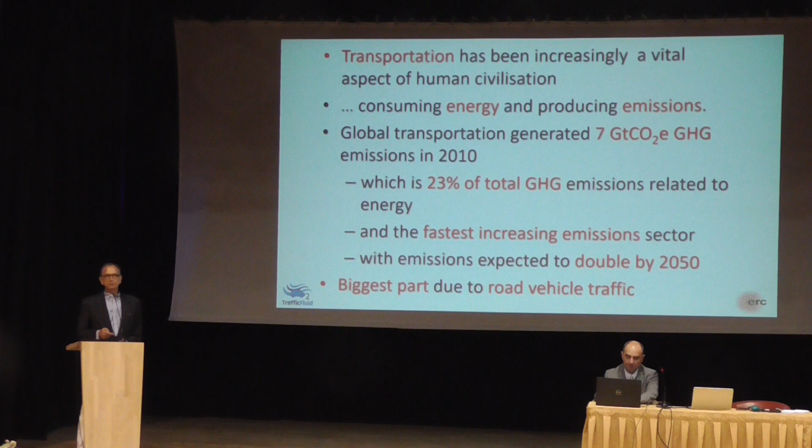As we all know, transportation exists since human society exists, but of course in recent decades, the last century, it has been increasing steadily in importance, and of course it is a sector that consumes energy. I'm not an expert in sustainability, but I picked those numbers about the corresponding emissions, which are 23% of the total greenhouse gas emissions related to energy, but it is the sector that is increasing most rapidly, and there are predictions that these emissions will double by 2050. Of course, I'm talking about transportation in general, but road traffic is the biggest part of those emissions. And that's the subject of our presentation.

Another thing we all know is that the motorized vehicle has been a very influential invention of mankind, and has shaped even the image of our planet. If somebody would come from Mars and look at the Earth, one of the first things that would probably be realized are the highways, the roads, and all those vehicles moving on them.

Of course, vehicles share a common infrastructure among them, but also with other users. And so it is necessary to have some rules. And this is the start of traffic management, traffic control: have some rules that guarantee that antagonistic streams of vehicles and other users are crossing in a safe way.

So safety is the first concern for traffic management, but in the last decades, as the density of vehicles, the number of vehicles, the demands on the roads increases more and more, we need to also look at efficiency of the traffic flow, and then traffic management becomes dynamic or real-time, as we will see, and this characterizes the era of today. Dynamic traffic management, which beyond safety also, of course, needs to address as far as possible efficiency.

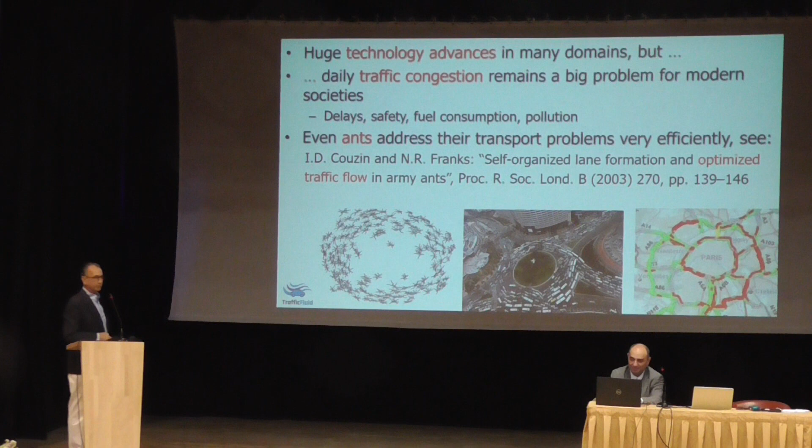And in this article they document that the ants behave, of course taught by biological evolution, in the best possible way to maximize the throughput of their highway. Something that for us is still, of course, not the case, whether in urban areas or in highway areas.

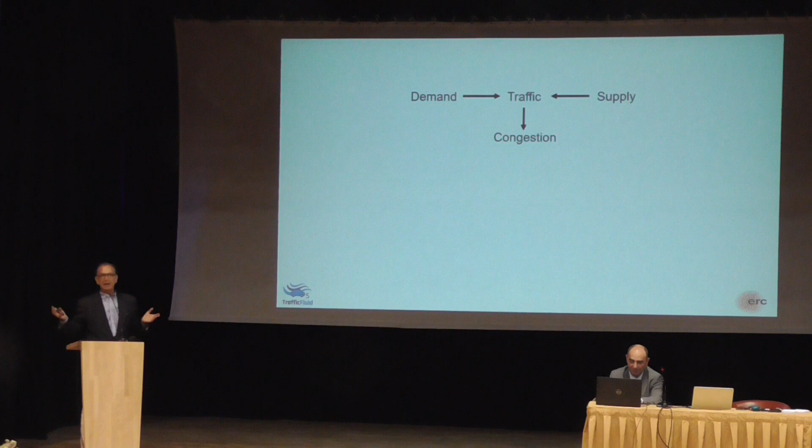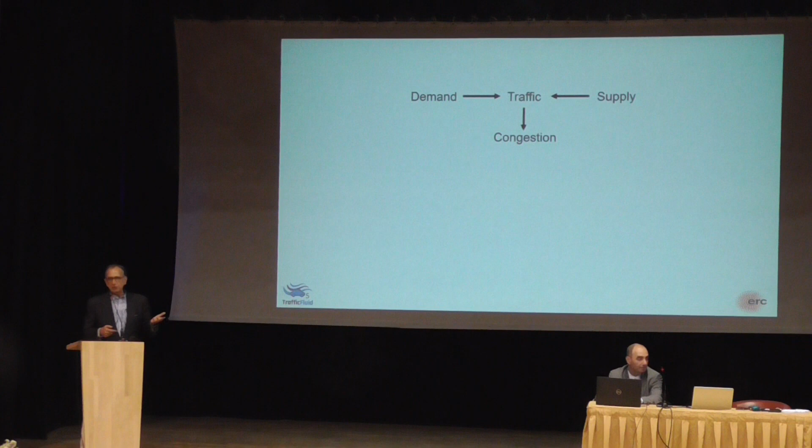Traffic depends on the match of two things. On one hand, the demand, which is the amount of vehicles, of drivers, of persons wishing to use the traffic network, and on the other hand, the supply of the traffic network, essentially the capacity of the traffic network. And these two things form traffic, which may be congested if the demand is higher than the supply. And so by this simple relationship, we can deduce easily what should be done if we want to mitigate congestion.

Either we need to reduce the demand, or we need to increase the supply. And here you see various ways of reducing the demand, or attempting to reduce the demand, like modal shift, meaning that in many different ways you try to have passengers moving from their cars to public transportation, or avoid the trips via teleworking, online shopping, etc., things that are meanwhile very familiar to us after COVID-19.

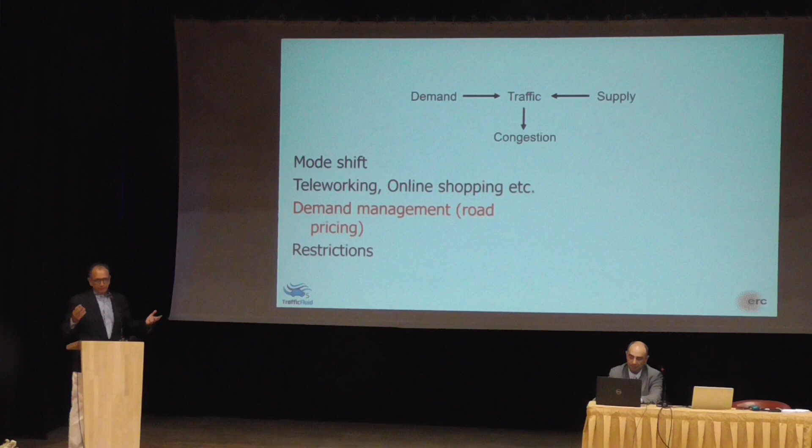Demand management. A major measure in demand management is that you ask the users to pay for using the roads, something that is practiced in many places around the globe, or of course just harsh restrictions of vehicles where they can actually drive.

On the other side, we may increase supply, increase capacity. How? The traditional way, which is of course not very popular meanwhile, at least in developed countries, is by expanding the road infrastructure. This is not deemed now to be the proper way if a basic infrastructure is already there. Providing information and guidance in real time to the drivers so that they may use parts of the network that are less congested, so exploit better the infrastructure, or traffic control.

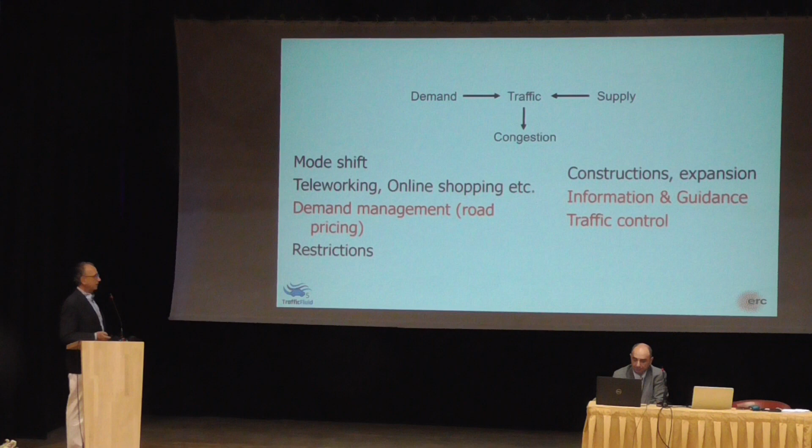And as a matter of fact, and as I mentioned, our roads are indeed congested during peak periods, both in the cities and around the cities. And this congestion, without counting for the accidents and anything else, costs Europe at least 1% of the gross domestic product. Right? And this is rather an underestimate because it is from a few years ago.

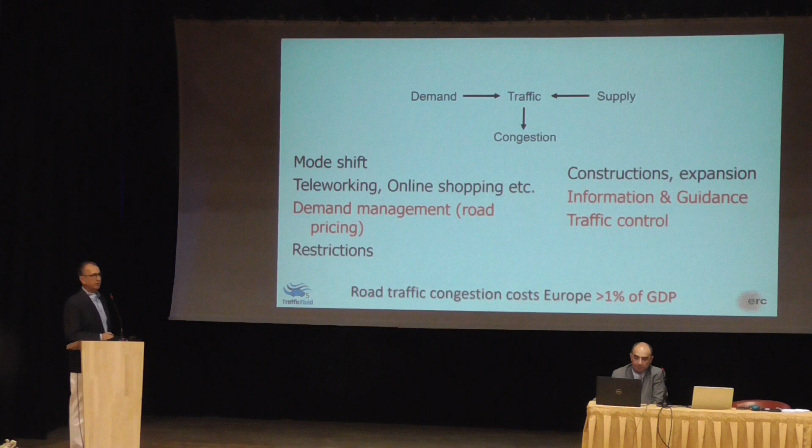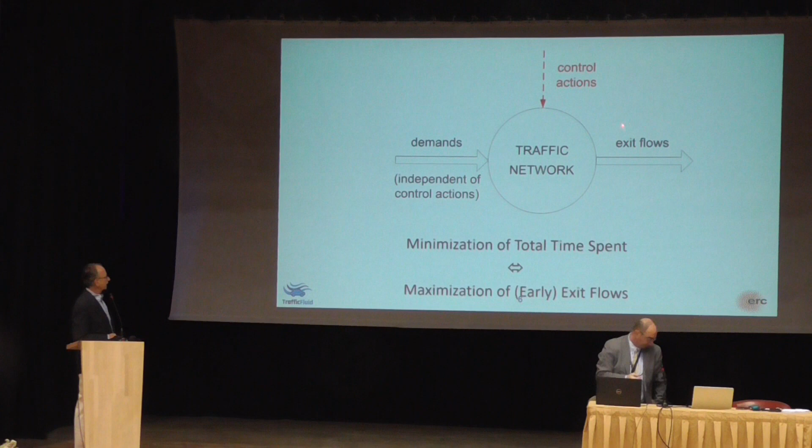Another useful slide to gain a bit more insight into what happens is this one, in which we have a traffic network of any kind. It can be transportation, and it can even be other kinds of networks, which receives a demand at its origins by vehicles that would like to go through this network to reach a destination, and the exit flows.

So, assuming that the demand is not changing, if we want to apply control actions to the network to minimize, obviously, the total time spent by all vehicles in the network, then it is very easy to understand and also easy to prove mathematically that this is equivalent to maximizing the exit flows. Because if the entries are given, to spend less time in the network, you need to maximize the exit flows. And as a matter of fact, congestion reduces the exit flow, blocks the exits of the network. And this is a reason for the generalized congestion that we witness today, as we will also see in a minute.

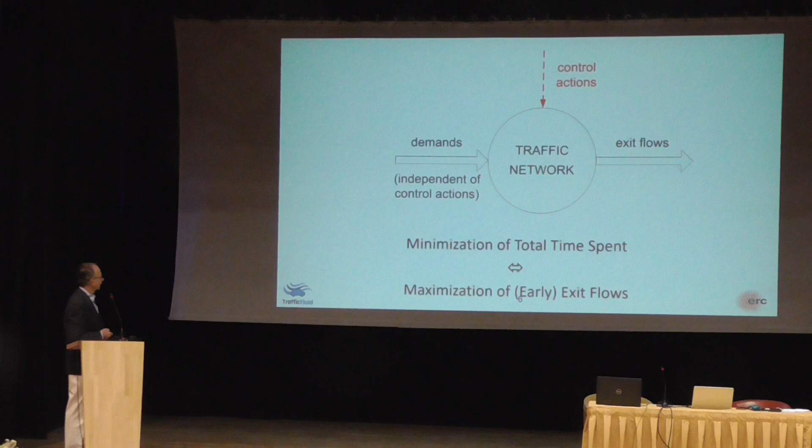To better understand this, let's compare other kinds of networks or queuing systems. If we have a simple queuing system, like you go to the airport to check in, and if the demand, the number of passengers, of clients, is higher than the number of employees, the number of counters, there will be a queue. So you will experience a delay.

However, the characteristic of a simple queuing system is that the capacity of the system, the serving capacity of the system, is constant, roughly. It's not a function of the presence of a queue or of the size of the queue. The employees will work at the same or similar pace whether there is a queue or there is no queue. That's a simple queuing system.

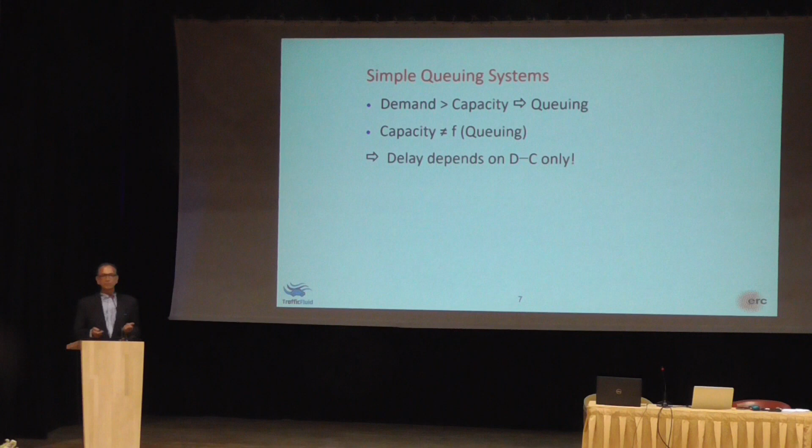There are other systems like water systems where higher demand and congestion, higher water level, means higher pressure and higher outflow and lower travel times. So in water systems, if you flood it, you get more out of it due to the pressure. It's not like a simple queuing system.

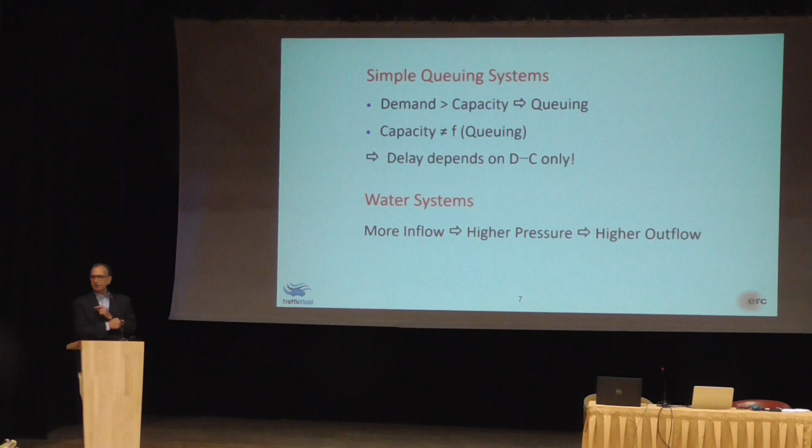What about traffic systems? Well, in traffic networks, for reasons that we will not discuss in detail here, any congestion leads to a degradation, a reduction of the capacity of the system, and a reduction of the exit flows.

So what happens is that if, in some link in the network, you have the local demand being higher than the local capacity, then you will have queuing, you will have congestion. And this congestion will degrade the local capacity, and this will, of course, accelerate the increase of congestion, and this will lead to further congestion and further degradation, and so on, so that eventually we get a vicious circle of events, and at the end we have a network that is strongly underperforming due to the degradation.

In fact, during generalized congestion in the network, if you measure the demand that is being served, it is much less than the nominal capacity for which the network was constructed. The system is underperforming.

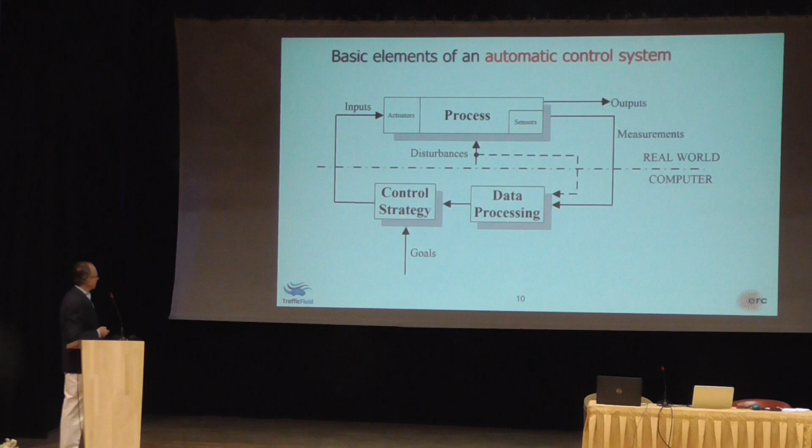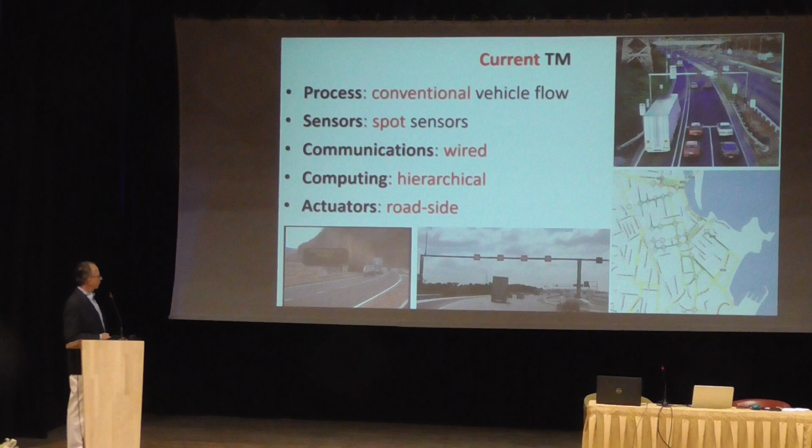So all these systems that are around, they have roadside actuators, the same for all vehicles, for all drivers. And in fact, our lab has worked in all of these areas, and we have many operational tools of these systems in 5 continents. And I would like just to demonstrate to you via simulation a variable speed limit system.

What we see here is a highway. There is a lane drop at the end, for example, because of a work zone or other reasons. And this forms a bottleneck. So if the demand is higher than the capacity of the bottleneck, then you will have congestion. So in the lower video, there is no control.

In the upper video, you have a variable speed limit here, about 500 meters upstream of the bottleneck, which you will see in real time being changed, because in the upper system we have a traffic control system measuring at the bottleneck, and depending on the density that it measures there, it reacts, and the variable speed limit tries to hold back traffic so that you never allow congestion to form.

I was expecting to see the video. Maybe I should operate it from the...

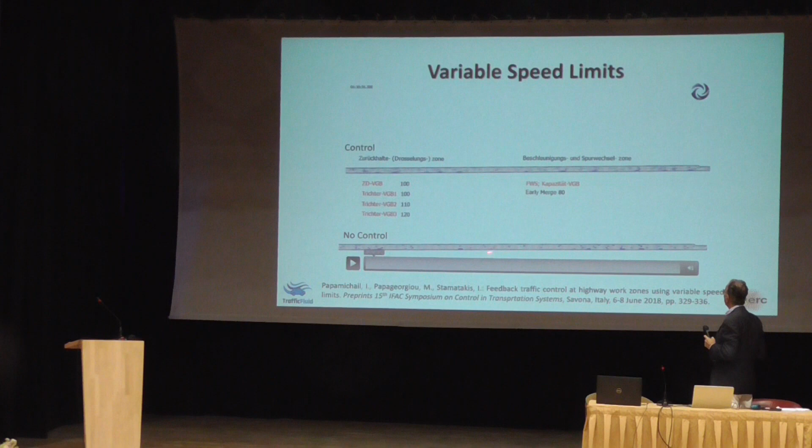So you see already here that in the case without control, we have already a queue that has formed because

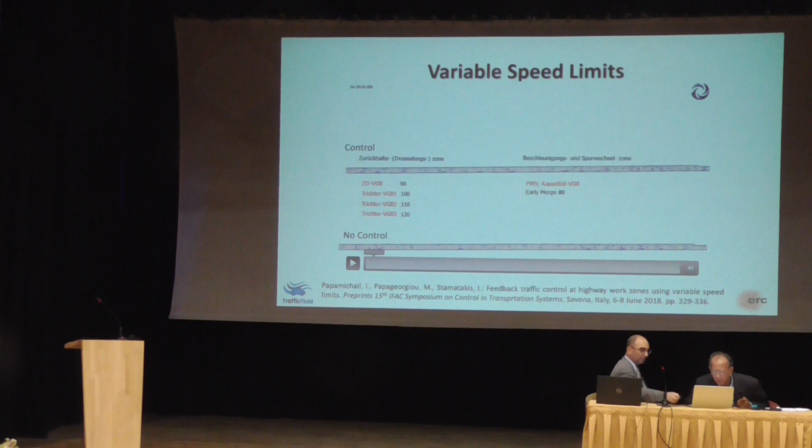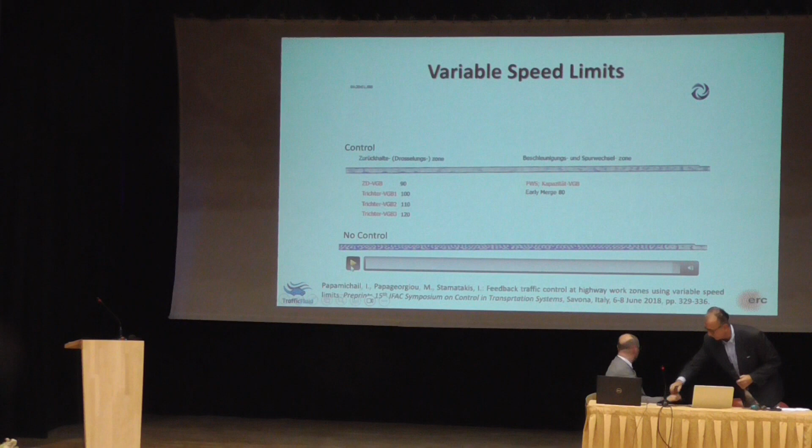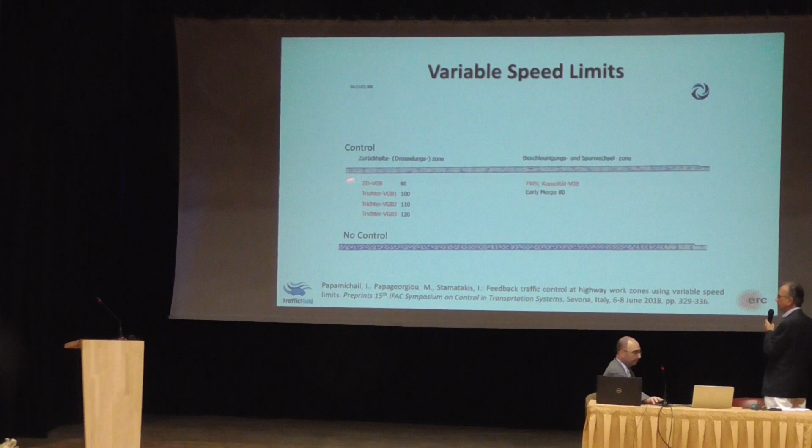That was already very far in the simulation, no problem. So what happens here is that whenever you have a higher density measured, this variable speed limit will reduce the speed limit to hold back traffic and dissolve any possible congestion that forms here. So this is an example of going slower to arrive faster.

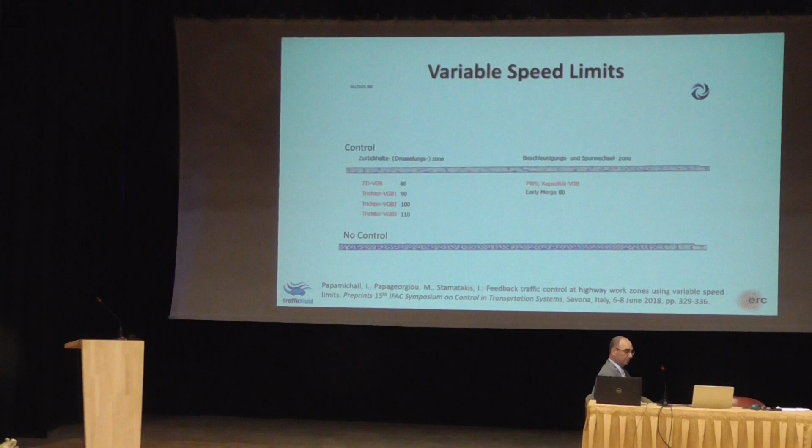While here, as you see, a queue has formed, and due to the queue, the outflow is about 15–20% lower than the maximum possible outflow, and so this leads to a corresponding improvement. So that was about the recent past and a big part of the present. That's the state of today.

So let's move a little bit to a more recent present and the short-term future. What we have today is a number of vehicle automation and communication systems that are being developed, and that can be classified into two axes. The first axis is about vehicle automation. Vehicles become more and more automated, or intelligent if you prefer.

There are already many systems that are available in the market. Most of the new vehicles dispose of an ACC system, adaptive cruise control. What is it? It is the ability of the vehicle to follow at a safe distance a slower vehicle in front without you needing to touch the brake or the gas pedal, right? Or also pilot assist systems that keep the vehicle in the middle of the lane without you touching the wheel. These systems are already in many models.

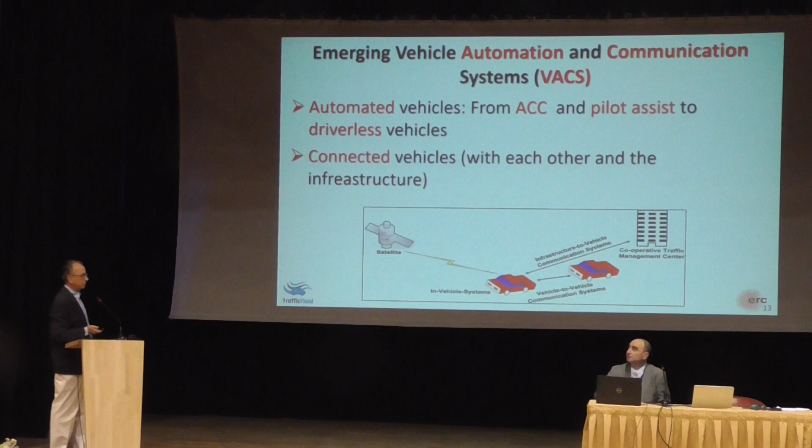Connectivity means that vehicles have wireless channels to talk, communicate with other vehicles around them, and also with the infrastructure. So these are changes in the vehicle itself, but they bring along also pretty important changes to the traffic management loop and its elements. For example, the process, of course, is still the vehicle flow, but now vehicles have different behavior than conventionally. Sensors.

Since vehicles are connected, they can send information to the control center about their speed, about their distance to the front car, and so on. So you don't need sensors, because vehicles become sensors that send much more information and much more precise information about the current situation. Communications. Not only are they wireless, but the most important thing, as I mentioned, is that you have a lot of new channels between vehicles and infrastructure that can be exploited for better safety and better efficiency.

Computing. What we have essentially with intelligent vehicles is a big number of moving, interconnected computers. So those computers can undertake tasks that conventionally were reserved to the traffic control center. And last not least, actuators. If vehicles are connected, they can receive all the messages on board. So you don't need to have roadside signals or messages that are the same for everybody. You can have individualized signals and messages and information. And we can see some examples.

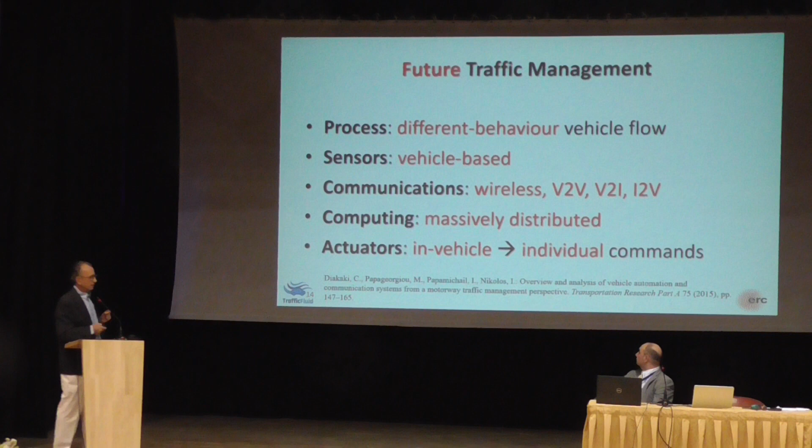All these things, of course, have implications for the traffic flow. Not always for the better, unless they are exploited in a proper way. And so the first ERC advanced grant that we got, that the chairman mentioned, was about looking at these things for now and short-term future in an environment where we have mixed traffic, meaning both automatic vehicles at different levels of automation and connectivity, and human-driven vehicles. How can we exploit the increasingly available capabilities of vehicles to make traffic safer and more efficient? So that was the content of the Traman 21 project, and I can give you a few highlights of it.

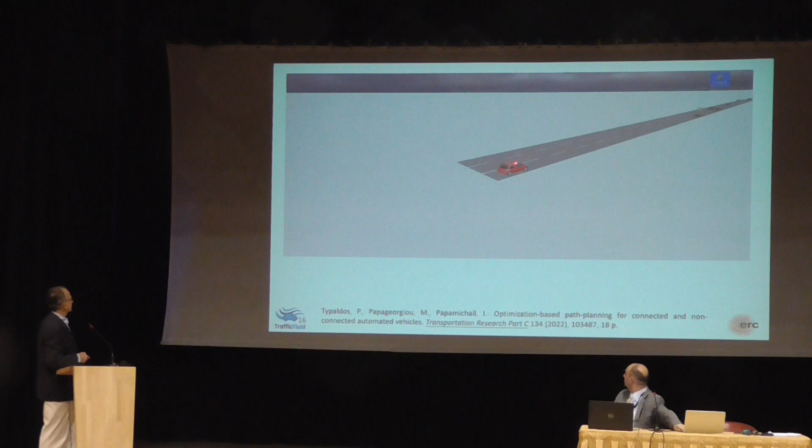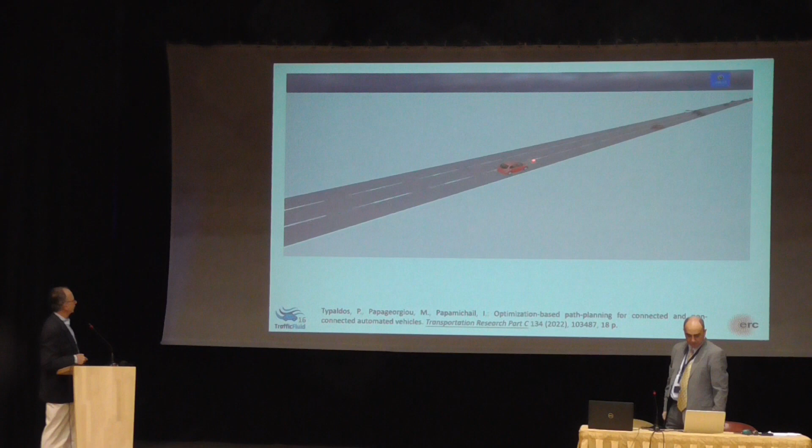So this is an automatic vehicle among manually driven vehicles, and you can have any percentage of automatic vehicles. The question is, how should it behave in a population of automatic vehicles? You see it here, driven by an algorithm, driving. It has three basic goals. The first and most important is no collision, safety. The second is that the driving is comfortable for the passengers. And the third is that it tries to reach a desired speed, if possible. And you see it trying to change lanes and make everything possible to satisfy those three goals.

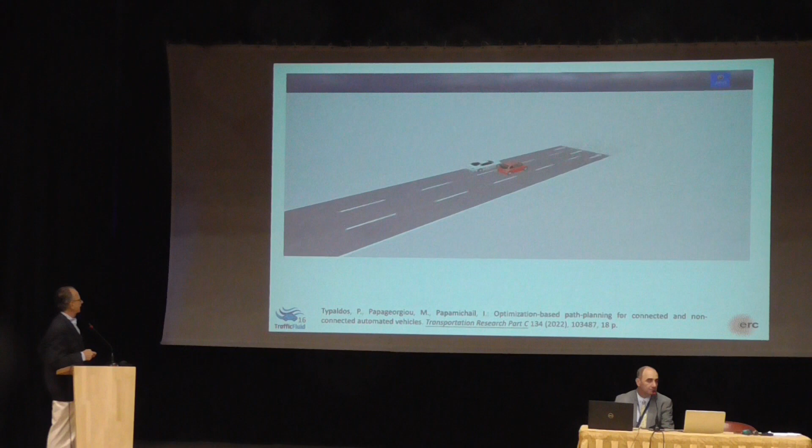This is the second example that most of you probably know, the famous GPS. What is it? Well, GPS is an individualized message for you, as I mentioned earlier, because you enter your destination and it guides you to your destination. So nothing to do with roadside messages.

And of course, you may not be aware, but you are also connected to the corresponding center of Google, of TomTom, whatever system you are working on. So that's how they know the current state of traffic, because they get messages every few seconds also from you, and not just from you, but from many other cars, so they can anytime be aware of the situation to be able to guide you in an appropriate way.

Another potential application is that due to the individualized commands, you can better balance traffic on highways, for example. Usually, the drivers by themselves are not able to optimize the traffic flow, to optimize their assignment of lanes, to retard or avoid breakdown in congestion.

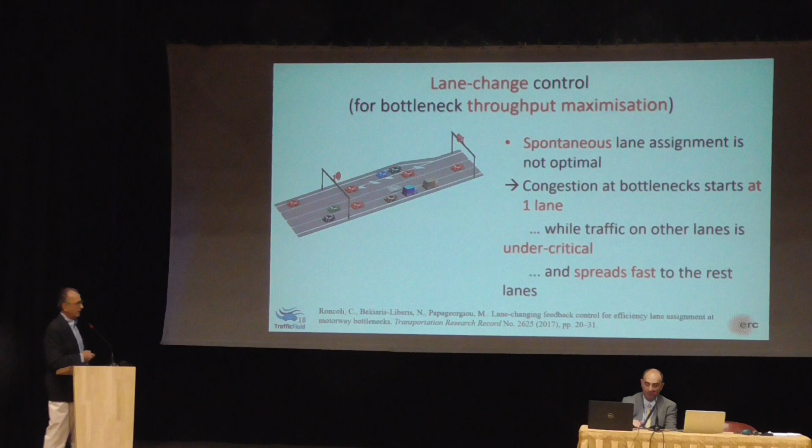And it wouldn't be possible with a roadside system, because what should you tell? Every 10th vehicle change lanes to balance better? That's not possible. But if you can send individualized commands, then you can balance traffic on the different lanes better, and in this way avoid congestion.

Another example, the GLOSA systems, green light optimal speed advice. What is it? Well, every driver among you probably has had this dilemma. You are approaching a traffic signal, which may be red or green, and you see it from, let's say, 200 meters distance, and you don't know how to behave in the aim of crossing without stopping. Should you accelerate? Should you decelerate? Should you go by the same speed?

You don't know. So GLOSA are systems that help you address this dilemma and cross, if possible, at green, of course, but without stopping. There are many apps of this kind, even for iPhones, where you either get a message when there is no realistic possibility to not stop, or it guides you to maintain, increase or reduce your current speed to be able to cross at green. Such systems may reduce fuel consumption and emissions by as much as 20% when applied.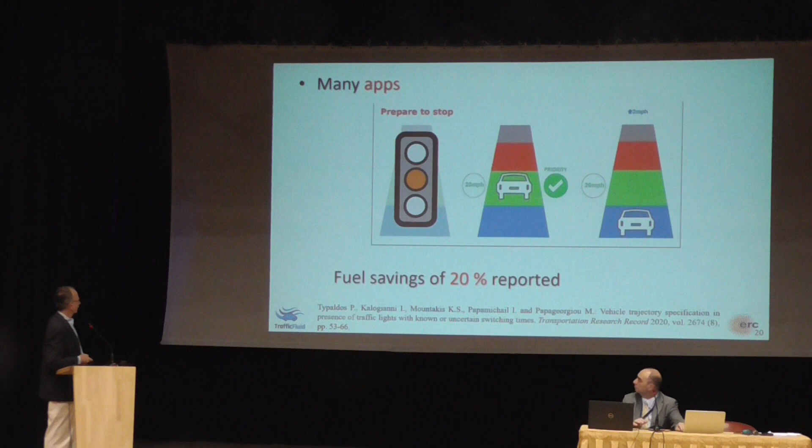And let me now take a more futuristic view of traffic. This is the second ERC grant I was talking about, under the name TrafficFluid, which is about traffic not tomorrow, but at a time when most vehicles are automated and connected at high levels, so we call them CAVs, connected automated vehicles. TrafficFluid proposes two principles for the traffic of the future, maybe not the nearest one. The first is that there should be no traffic lanes. The second is that vehicles behind can influence the driving of vehicles in front, which we call nudging.

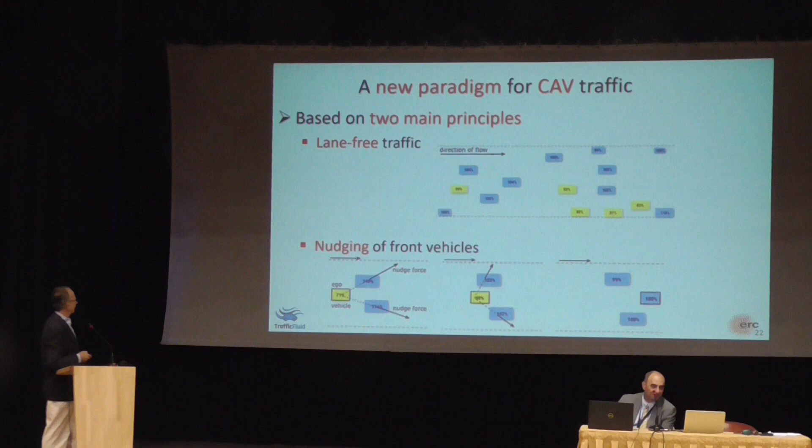To better understand why these principles, let's think about human driving. Humans have a perception limitation: we can only look in one direction at a time, not all around simultaneously. And when we are driving, this direction should be forward. This has some consequences. For example, in the 1950s, traffic lanes were introduced. Before that, there were no parallel traffic lanes. You could drive anywhere, even on a highway.

Why were traffic lanes introduced? To simplify human driving, because then driving reduces to car following. You just look at the vehicle in front of you and try to keep a safe distance. Of course, it also has consequences. First, fixed lanes must be wider than the widest possible vehicles, so you waste a lot of space laterally. And second, you sometimes need to change lanes, which is a very risky maneuver. 10% of all road accidents are due to lane changes.

A second consequence is that when you drive, you just look ahead, you don't look behind, so traffic behind you has no influence on your behavior. When you make the step from microscopic to macroscopic, the flow is anisotropic. For example, there is no pressure, as we mentioned earlier. In water, particles push the particles in front; in traffic, they don't. And this has consequences for the traffic flow: you can increase capacity and stability if vehicles are influenced in their driving by vehicles behind.

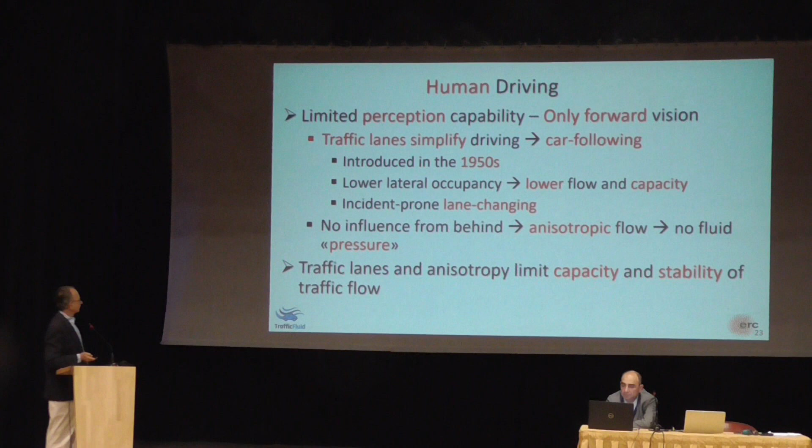What about CAV? Well, CAV is quite a different thing than human driving, because they can look all around simultaneously, reliably, fast. They can extend the area of their perception by communicating with other vehicles. And of course, they make very fast and computer-based decisions, algorithmic decisions. So they are quite a different thing.

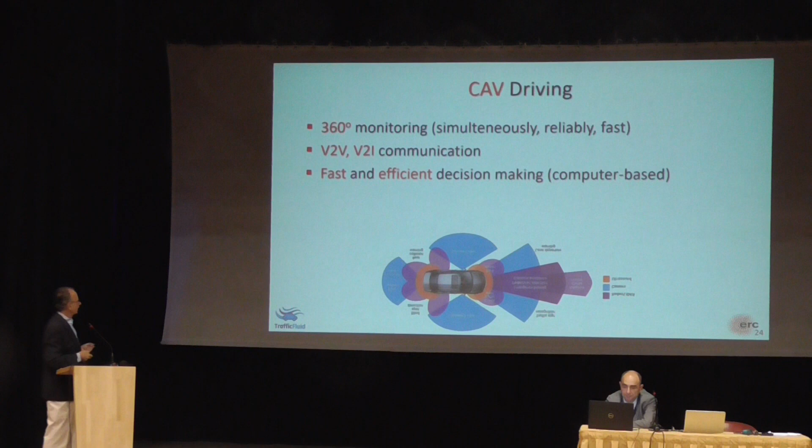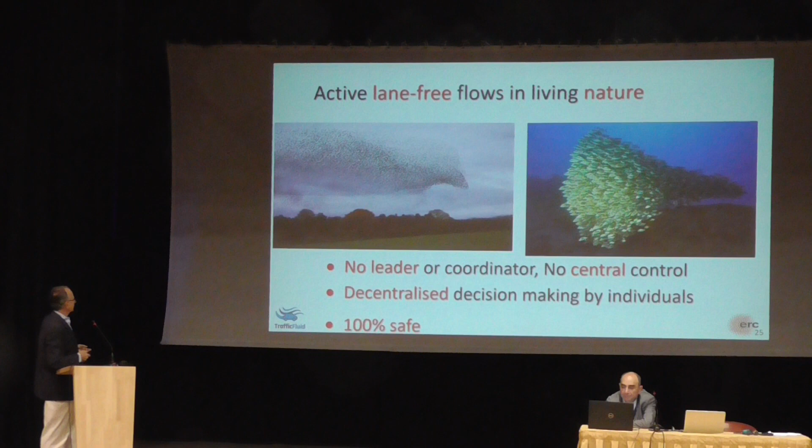And even in human society, if you look at pedestrian flows or cyclist flows, you see that they form no lanes. In fact, in this video that we will see from Beijing Tsinghua University, which is a bicycle avenue, you see that there are two directions, and the boundary between the two directions is not marked, but is virtual and is moving spontaneously depending on the corresponding demand.

Can you switch, please, the video? It's below the, yeah.

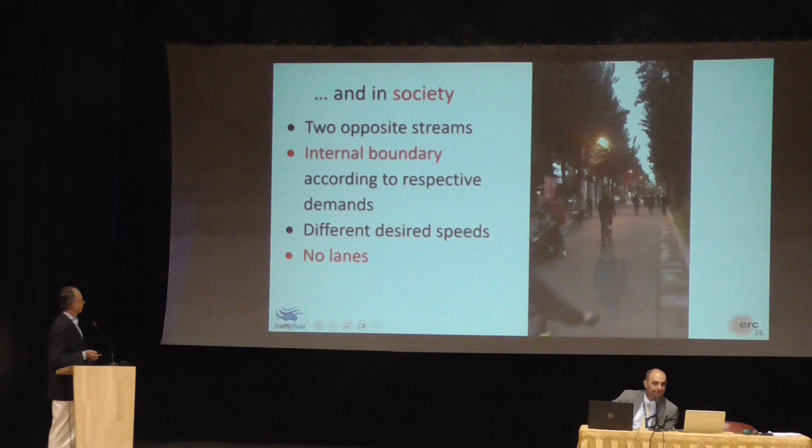So, our working assumption in this project is that CAV do not need lanes and do not need anisotropy. These seem to be fossils from human driving here. And we investigate smooth two-dimensional driving, smooth in the sense that you don't have abrupt lane changing, like in conventional traffic, or automated traffic with lanes. Higher lateral occupancy, and that means higher capacity.

And what is very important, we will see it also in a minute, in a lane-free road, if you widen the road by 10, 20 centimeters, 1 meter, you increase the capacity, because vehicles spread and cover that part of the road and reduce density and increase speed. While, of course, in lane-based traffic, you need at least one additional lane over several kilometers to increase capacity. And we will see that this can be exploited in some ways.

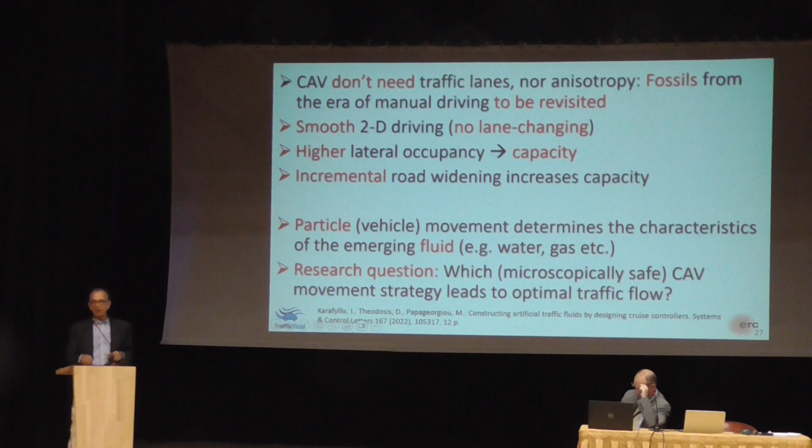So we know for any fluid that the emerging flow behavior is an outcome of what the particles are doing. And in that sense, if we have the liberty to be without lanes, to be non-anisotropic, the research question is, what should be the movement strategy of individual vehicles so that the emerging traffic flow becomes optimal or well-behaved?

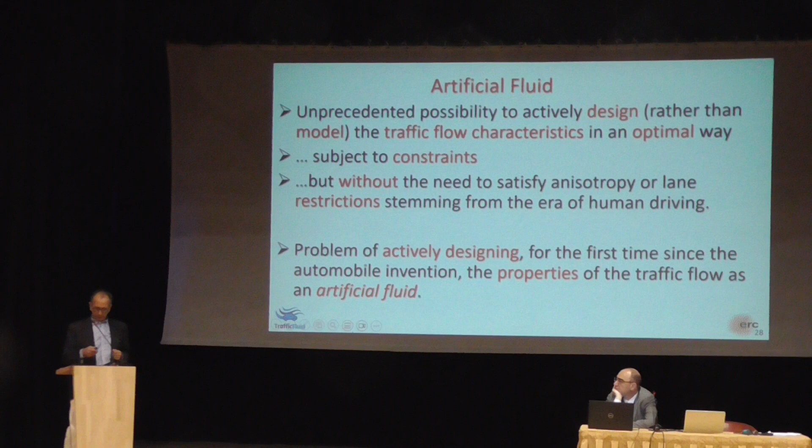And in that sense, we may talk about a future traffic flow that corresponds to an artificial fluid, meaning an engineered fluid. Because by specifying in appropriate ways the movements of the vehicles, we can influence in a beneficial way the properties of the macroscopic traffic flow. And I will give you some few highlights of some things that are related to this traffic fluid thing.

Could you please start the video if possible?

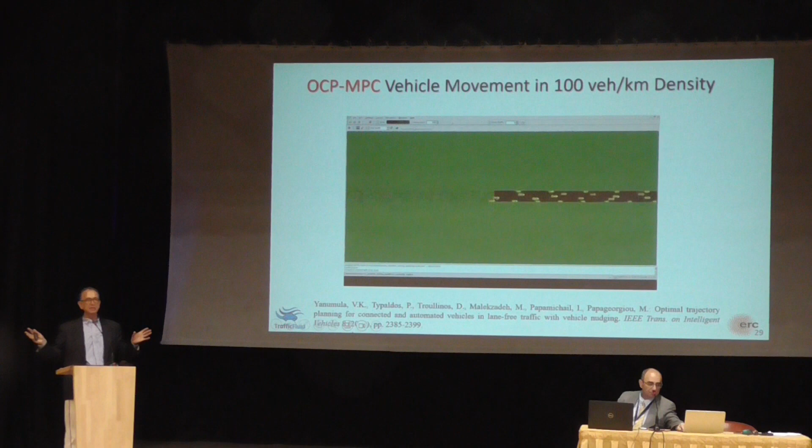So what you see here is a lane-free ring road. The camera follows this vehicle, and every vehicle drives by deciding about the next 8 seconds, and whenever it makes a decision, it broadcasts this decision to other vehicles so that they know what very likely it's going to do, but they never apply those 8 seconds. Usually after every second they replan.

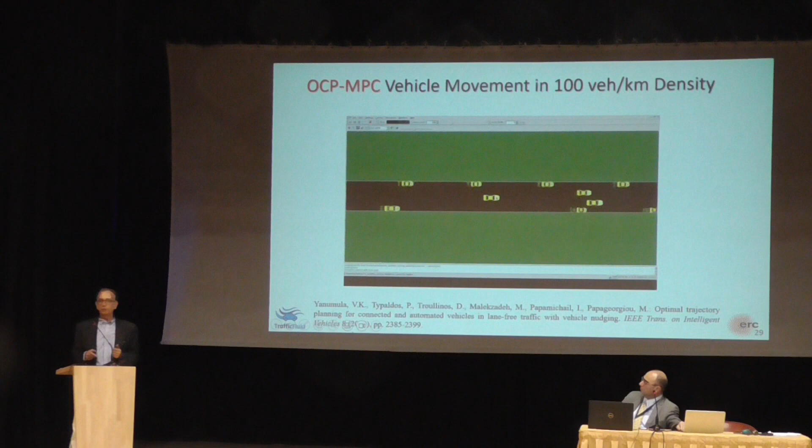The vehicles have different desired speeds, so you may see some being slower, some being faster, either because the density increases or because they have a different desired speed. So you see the width of the lane, if you would have lanes, would suffice for barely 3 lanes. But you see that vehicles may drive also with 4 vehicles laterally. So let's keep this.

Now, the same concept here is also applied, but for a group of vehicles simultaneously. So we optimize with a single optimization problem the behavior of multiple vehicles, of a group of vehicles. This is an artificial scenario that I will present here, and I will tell you why we do that. So you see here 7 vehicles driving. The first one has the lowest desired speed, and the last one has the highest desired speed.

So the last vehicles need to overtake all the previous ones. And on the top of that, even avoid some red obstacles while driving lane-free on the road, driven by a single optimization problem. Why do we do that? This is just the first step to test the tools.

The next step is to try to see how vehicles could drive in groups like the birds, forming flocks, deformable flocks with the same speed. Or they could drive in a platoon, one-dimensional platoon, which can move like a snake in traffic, so that you have smaller distances among vehicles of the group, but higher distances for safety among different groups.

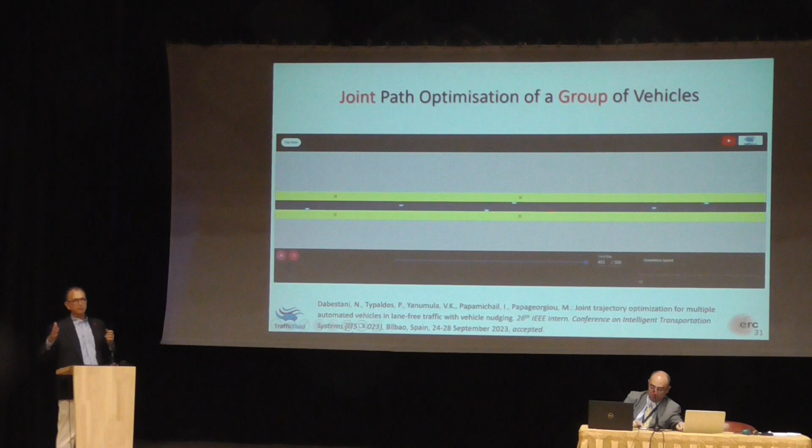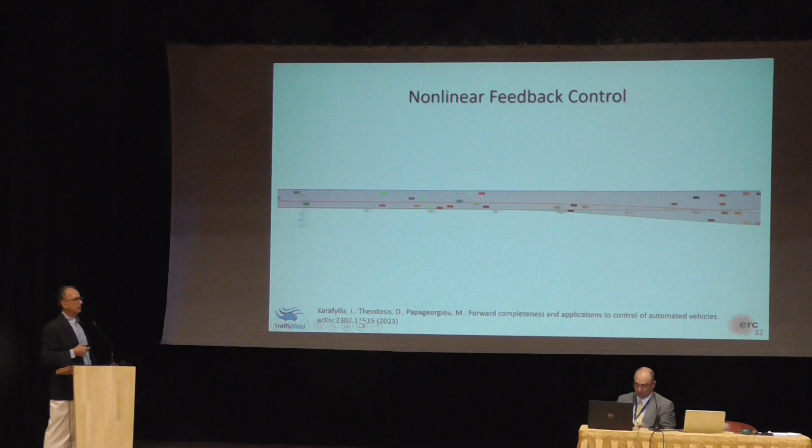Okay, this is another control strategy. This is a reactive control strategy. Again, for lane-free, here you have also exits, and these cars will merge again. Everything is based on a decentralized control strategy for every vehicle that, as you see, swiftly drives every vehicle on the road.

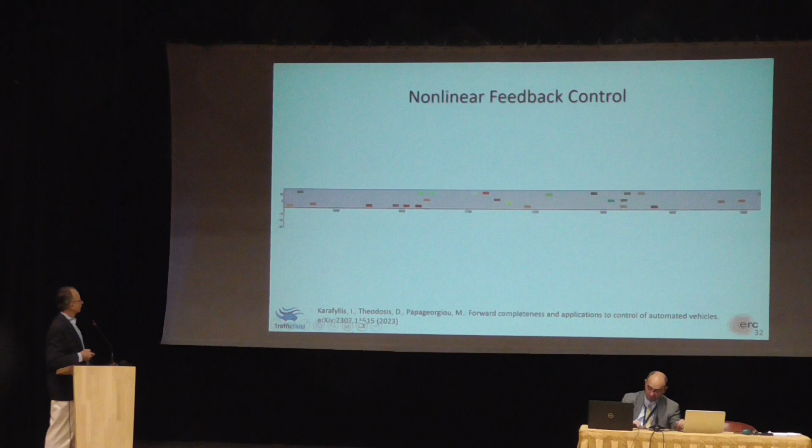You may recognize this monument, the Arc de Triomphe in Paris, and this is a photograph of the roundabout. This is the Arc de Triomphe. This is the famous Avenue des Champs-Élysées. This is a very complex traffic infrastructure. The width of the roundabout is 38 meters, like 12 urban lanes, right? And you have 12 radial streets, bidirectional. So that means you have 12 times 12, 144 different origin-destination movements on a roundabout of 38 meters. You may imagine this is a very complex thing, and there are no lanes anyhow.

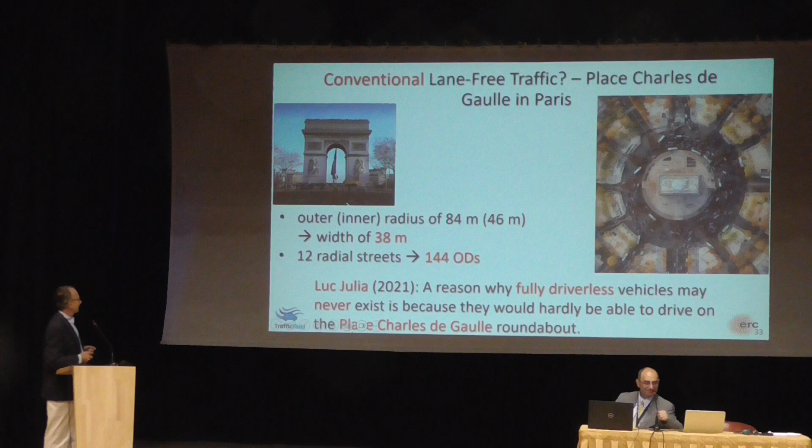If you drive on this infrastructure, there are no lanes. It would make sense to have lanes. And in a keynote in 2021, Luc Julia, who is an icon in artificial intelligence and autonomous driving, said in his opinion the fully driverless vehicles may never exist, and he mentioned two reasons, and one of the reasons was that they would never be able to drive on this roundabout. So for us, we were working lane-free anyhow, so it was a trigger to try to demonstrate the opposite.

So, can you start it? Okay.

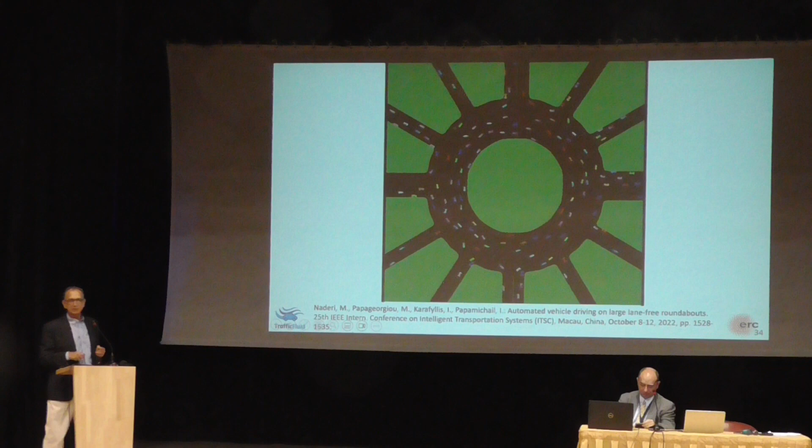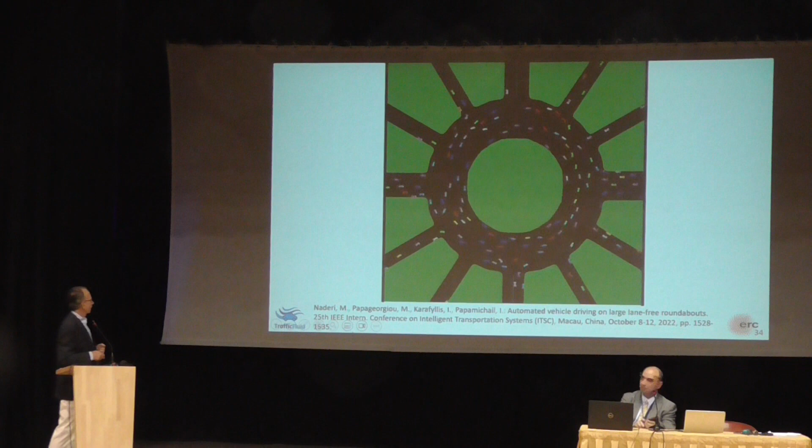Yeah. So we developed a movement strategy for vehicles that allows them to move even at high densities on this roundabout without collisions, of course, and guaranteeing that no vehicle will miss its exit. So the color of the vehicles here, every color corresponds to one exit. So we managed to address this issue.

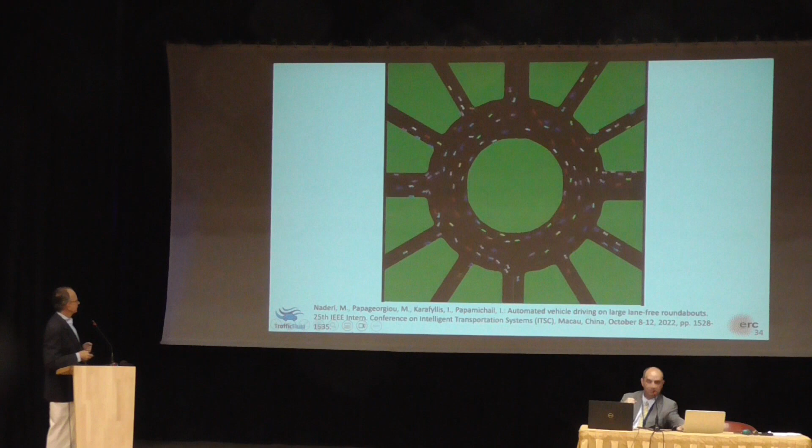Let me go to the next highlight, which is internal boundary control, a very strong point for lane-free traffic. What is it about? Consider a road or a highway with a total width W. Total means for both traffic directions, direction A, direction B. Conventionally, you would usually have an internal boundary, which is a straight line in the middle. But if we have lane-free traffic, we may consider the internal boundary to be a function of space and to be changing in real time, driven by a control strategy, depending on the traffic conditions. So if you have a lot of demand on this side, then you shift it upwards or vice versa.

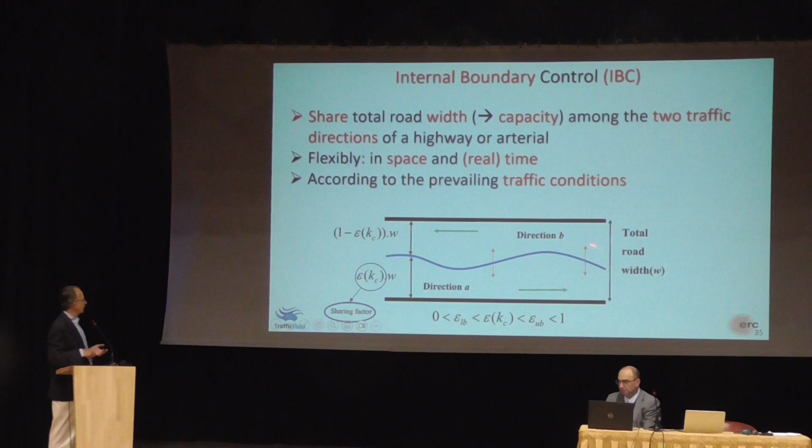And to just demonstrate without going into design details, we see here a highway subdivided into sections. In the upper case, we have no control. In the lower case, we have internal boundary control. And we use as a demand on the upstream side first a peak in direction A over time. This is time, and this is the demand. And then a peak in direction B.

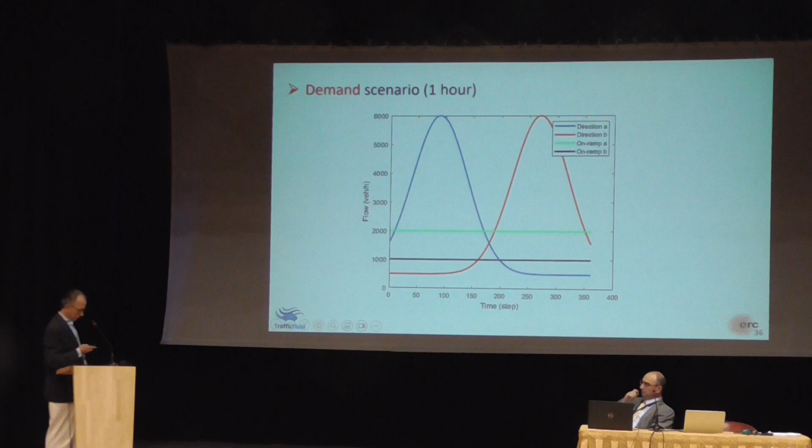And can you start the video again?

So now you see, because of strong traffic flow arriving from here, the system moves the boundary upwards, while in the no control case, you have a congestion forming at the merge of the on-ramp with the traffic flow. Right? Here the congestion is completely avoided thanks to the internal boundary control. And then when flow becomes stronger in the other direction, the automatic control system moves the boundaries of every section here downwards to avoid the congestion that will form in the no control case, again in the merging section over here.

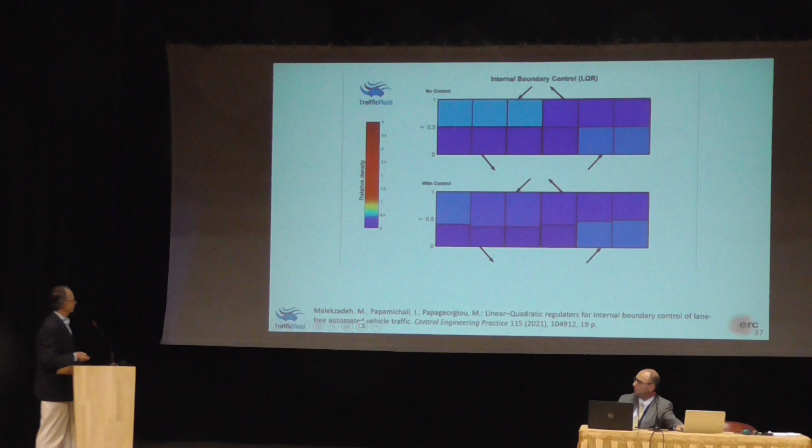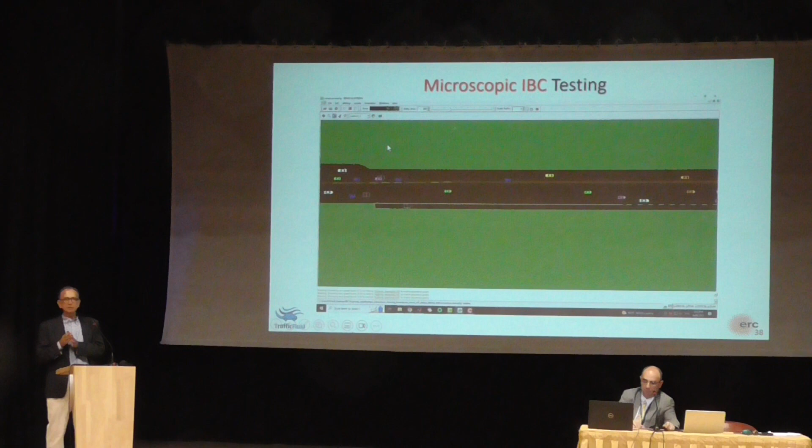And this is, of course, a simulation with macroscopic models, but we can also test it with a microscopic simulation. Can we go to the next video and start it? Yes. So you see here the same thing with microscopic simulation. You see the internal boundary, actually two internal boundaries, the green for the lower side and the red for the upper side. You see that it is not in the middle, it is already shifted because the density in direction A is higher than in direction B, and this boundary is being shifted every minute depending on the traffic conditions to facilitate traffic, to mitigate, to avoid congestion.

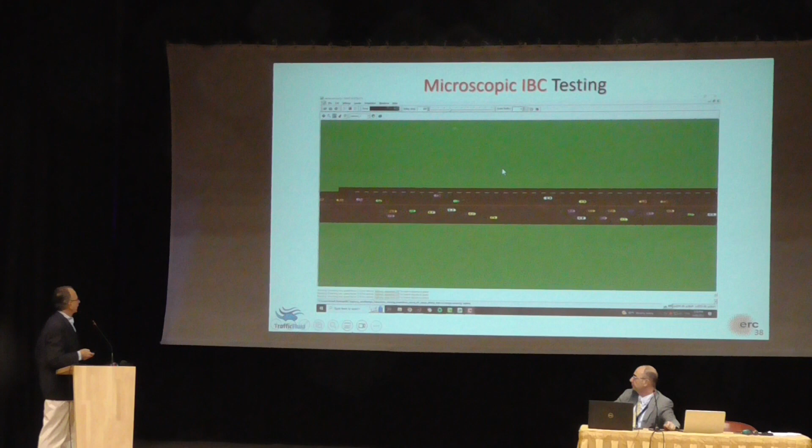And a last highlight, lane-free, signal-free intersection crossing. Usually in such intersections you have traffic lights, but again, we can optimize all vehicles around the intersection simultaneously so that they can cross simultaneously without collisions, of course, and as efficiently as possible. Let's see if I can start it from here. No, can you please start? So you see how the intersection of the future may operate with automated vehicles getting instructions from a control center.

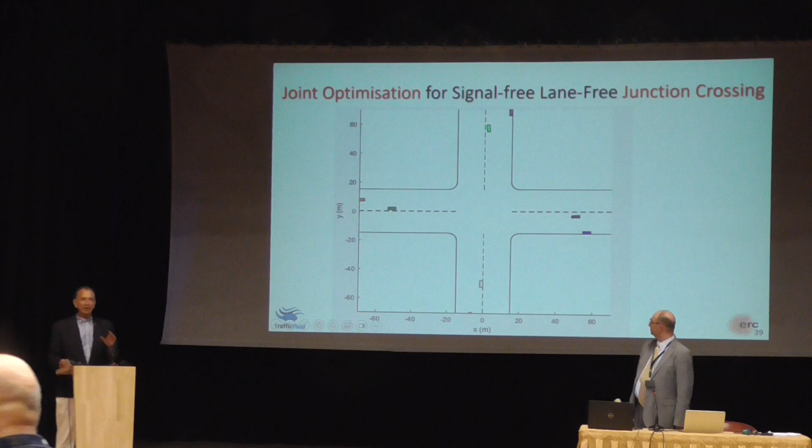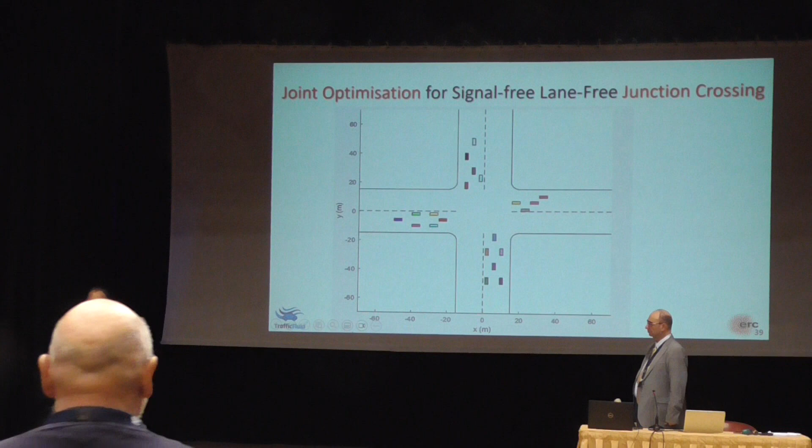We may face it in a second step of our research, when we will try to make vehicles cross maybe less efficiently, but in a decentralized way, each one making its own decisions. But in this example that I mentioned, and also other groups working in this area, we usually consider the problem as a joint optimization problem for all vehicles. So since we have a joint optimization problem, we have implicitly a cooperation between vehicles.

The optimization problem, unless it is stuck in a very bad local minimum, will not allow any vehicle to stay forever just to let other vehicles cross. They all must cross, and they all must cross in a reasonable time. I agree that something like what you described might happen in case you have decentralized strategies without explicit cooperation among vehicles. Then some things like that might happen, and we will need to address it.

By the way, one addition, a crossing like this reminds me of crossings in India, and it works somehow for humans as well. I must confess, after the first ERC grant, which was a lot of work, I did not intend to go for a second one, but when I went to give a short course in New Delhi, I got the idea about the traffic fluid concept, lane-free traffic, and nudging of vehicles, influencing vehicles from behind.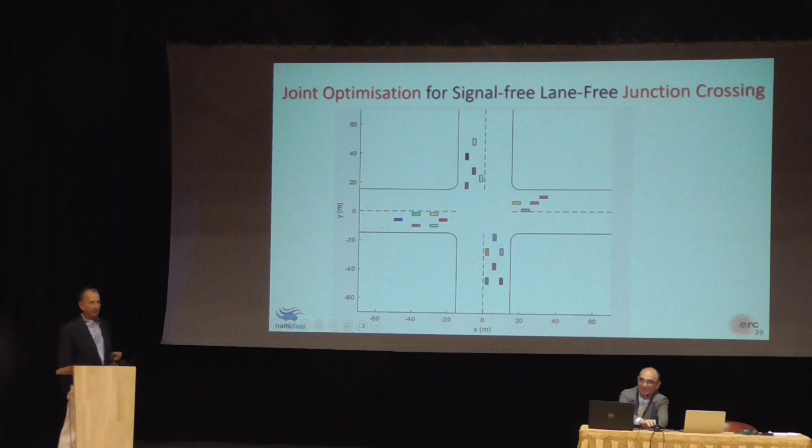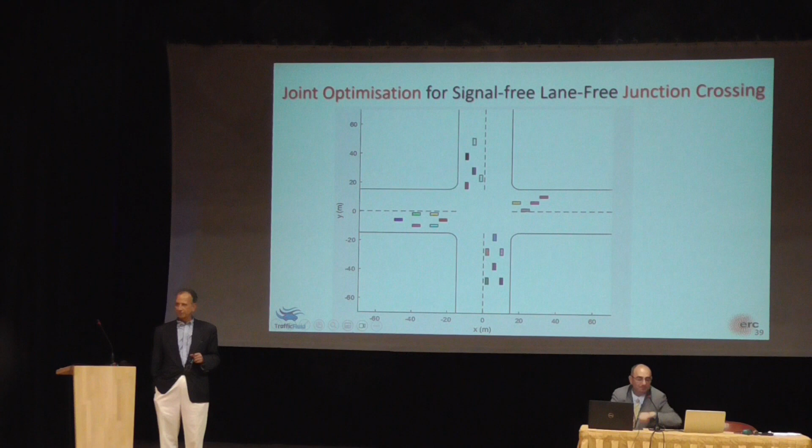Yeah, thank you very much for this interesting topic. I believe that without lanes and without signals, you can really organize any process if it's automated. As you told, you have sensors and then you can check it. And I think about the airport, when the luggage is distributed to different airplanes, there's nobody ruling something, everything is by sensors and automated decision making.

But now we have, from my point of view, 2 aspects. One aspect is that humans use a car to have fun. And you mentioned, there is someone who wants to ride fast, and somebody wants to ride slowly and look at the landscape or orientate what is next. So this human factor is one. This means you exclude this effect, why people are using the cars.

And the second one is the legislation. When cars crash and a bird falls down from the heaven, what happens then? This means all the traffic rules are completely ignored. There is no left for right or right for left, and there is no signal green or red. So the cars go automatically, and there are people sitting inside, and then something is wrong, because we believe that GPS is working all the time, and computers are working all the time.

There is no misunderstanding, and how are these aspects considered in the research about the realization of such a system? Because the transition period, I think, is very difficult. If you have some cars that are ruled automatically, and others with people behind, then I think it becomes very, very difficult from a heuristic point of view.